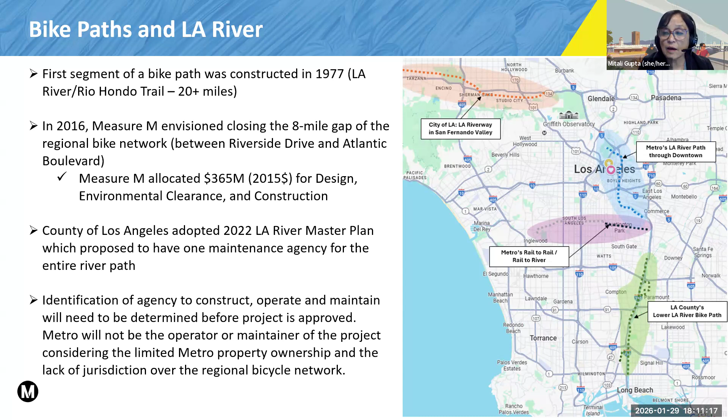The vision began with the original 20-mile bike path completed in 1977. Measure M later committed $365 million to close the largest remaining gap. In 2022, the County of LA adopted an LA River Master Plan, which recommends a single agency or entity to maintain the full 51-mile corridor when complete. As the project advances, Metro will identify an agency to construct, operate, and maintain it, since Metro lacks the property ownership and jurisdictions to serve in that role. I'll cover this in more detail later. Next slide, please.

This project is guided by 6 core objectives: safety, access, efficiency and sustainability, equity, user experience, and health. These priorities are built into the design with separate paths for cyclists and pedestrians, connections to key destinations, gentle slopes for all ages and abilities, and infrastructure that supports active and sustainable travel.

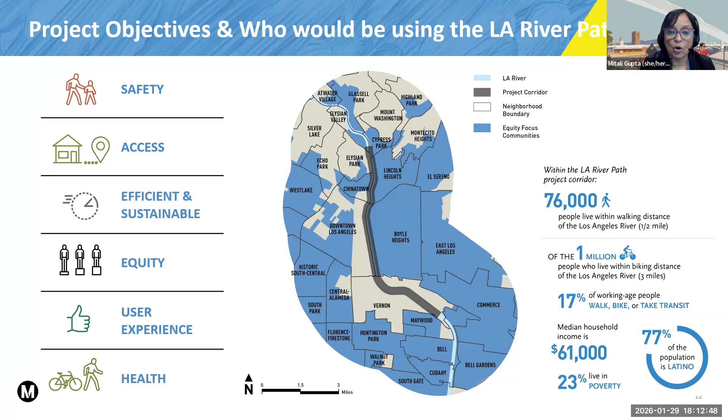Next slide, please. This corridor is highly constrained, as you can see from the picture, especially the one on the left lower side, because it has limited right-of-way due to rail lines, utilities, and power towers, including infrastructure within the river channel. The 8-mile project passes under 30 bridges, many of which are historic, and mostly under the City of LA's jurisdiction, requiring a combination of elevated and incised segments along the riverbank. The city and county together own 80% of the right-of-way. Metro owns only 1%. Additionally, there is easement held by the Corps of Engineers and flood control districts. As a result, Metro must pursue a partnership with the city and county to lead the construction, ownership, and long-term operations and maintenance. We've started some initial discussions, but no agreement has yet been put in place. With that, I will hand it over to Christian.

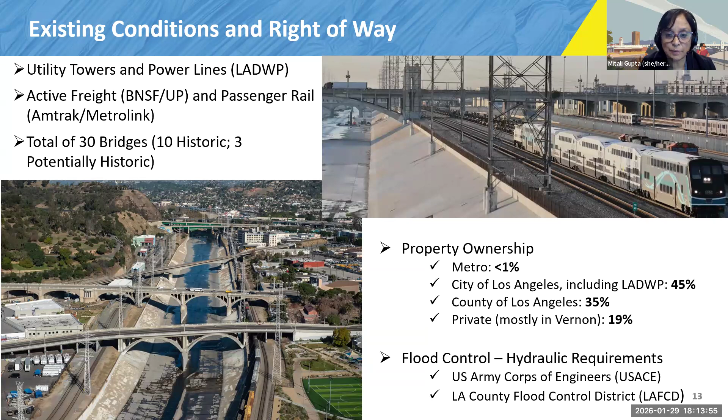Thank you, Mitali. Next, I will present the 3 key features common to all alternatives: access points, path types, and bike ped bridges. Access points connect communities to the project and may include amenities like wayfinding, seating, and landscaping. For the path types, due to limited right-of-way, much of the project will be built within the river channel, primarily as elevated structures or incised paths to navigate around railroads, utility towers, and bridges.

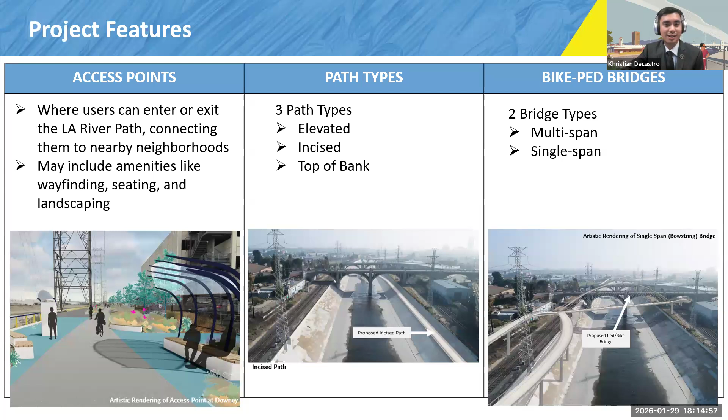Where right-of-way is available, mainly in the southern section, top-of-bank alignments are proposed. During conceptual design, a bottom-of-channel alignment was considered but excluded from environmental review due to safety concerns and poor performance against project goals. Public and stakeholder feedback emphasized safe access from both banks, leading to the inclusion of bike and pedestrian-only bridges, designed either with multiple footings or clear spans to cross the river. Next slide, please.

The design assumptions of the LA River Path project, proposed in Measure M, have since been refined as the design advanced. Since 2018, Metro has held several public and stakeholder meetings. The inputs from these meetings and the technical analyses of the project have influenced some key changes, including prioritizing safety, designing for wider paths to accommodate user demand and allow for emergency vehicle access, and access to both sides of the river.

In general, the alternatives start and finish on the west bank, connect to communities on both banks and to major destinations, directly or indirectly. These destinations would include LA State Historic Park, Albion Park, Union Station, and Park at 6th Street within the city of LA. In the city of Vernon, common connections include Bandini Soto Triangle, a commercial destination. Next slide, please.

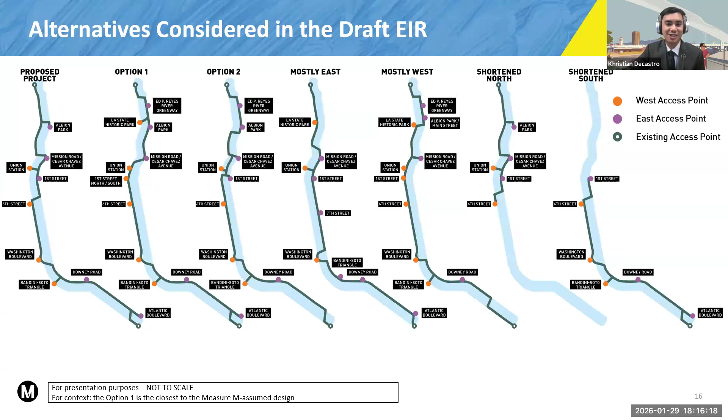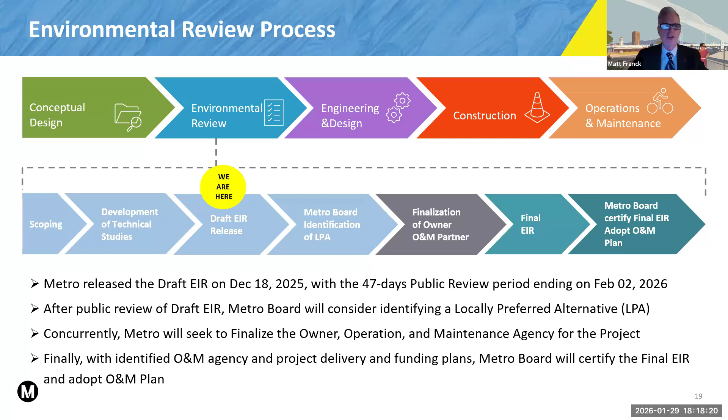So what is this draft EIR and why is it important? It is an environmental impact report, a formal study required under the California Environmental Quality Act, a CEQA document. The purpose of the CEQA document includes several important components. It analyzes the significant impacts of the alternatives across a broad category of different types of environmental resources, 18 of them in our case. For each of those categories, the impacts of the projects are evaluated, and where necessary and feasible, mitigation measures, these prescriptions, are made to reduce significant impacts.

Importantly, in addition to the technical aspects of the CEQA document, this process provides an opportunity for the public to review and weigh in on the project and its environmental impacts before Metro commits to a single alternative and advances the project forward. Why is the project important to Metro? The LA River Path would provide a safe alternative mode of transportation, especially for those who rely on public transportation. It expands equitable access to jobs, housing, and a myriad of other important community amenities and services, especially in this area, providing those to underinvested communities.

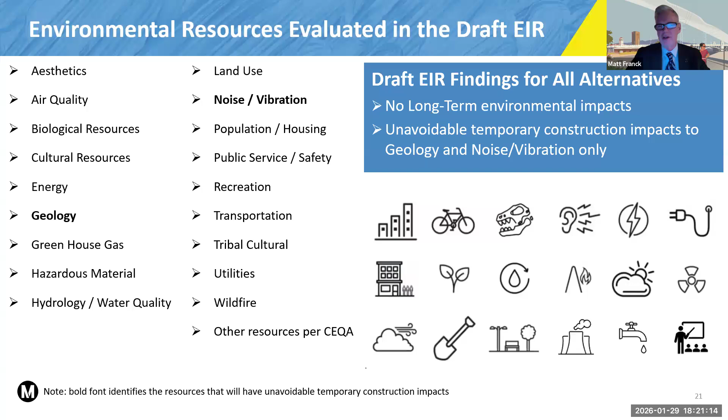However, for construction, it is a big project that's going to require a lot of equipment, time, and effort to build it. Although there's a variety of types of construction impacts, there are what we call significant and unavoidable impacts in a couple of categories. Those are highlighted in bold: geology, which is actually a paleontological impact, and noise and vibration. Next slide.

Let's take a deeper dive into those two specific categories where we have significant and unavoidable impacts. In areas where we expect deeper excavations into previously undisturbed soils, which will happen in some areas, especially where we have bridge piers or elevated structure requiring deeper excavations, there is the potential to uncover paleontological resources during construction that are currently unknown, but because it's the LA basin, we know they're down there somewhere.

We may or may not find them, but in case we do, we have a series of mitigation measures: starting with a plan for how to monitor and what to do if they're found, committing to worker environmental awareness training so people get a tailgate session on what to do if they find a bone, and a plan for curation of paleontological resources if found, from a scientific perspective. But it's still significant and unavoidable even with those measures.

For noise and vibration, it will be noisy during construction, and the noise levels will vary depending on the type of construction equipment used. In areas where there are deeper excavations requiring more intensive construction, those impacts would be greater.

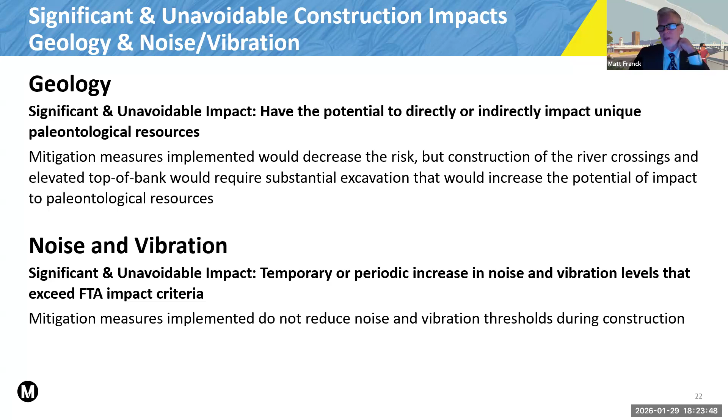We have a series of measures to ensure noise control, following local requirements for noise abatement to the extent feasible, but we still find it to be significant and unavoidable in some cases up and down the corridor. Next slide. So here's a summary of these different environmental resource categories and their conclusions.

We evaluated impacts during construction and after completion of the project. We've talked about significant and unavoidable impacts. We also have what we call less than significant with mitigation - so there is something to see in terms of significant impacts, but we've prescribed measures to reduce them below our thresholds in one case during operations, though mostly these are construction level impacts.

For most other categories, especially once construction is complete, there are less than significant impacts - there's something there, but it doesn't exceed any thresholds. In some cases, there's no impact whatsoever - those are no impact categories. So that's a quick summary of the contents of the draft EIR and its key conclusions.

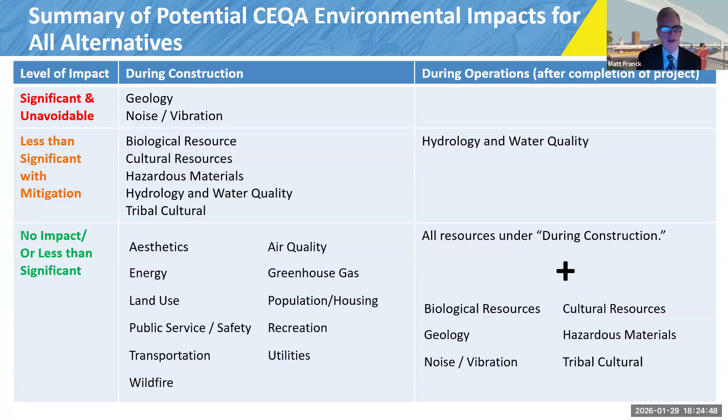If we go to the next steps, next slide, I'll turn it back over to Matali to discuss next steps. Thank you, Matt. Next slide, please.

So what happens after the public commenting period is closed? Once it's closed, Metro will collect all the public and agency inputs that come in during this time, and together with the draft EIR analysis, which we've already done, and consideration of feasibility, safety, funding, and schedule, we'll develop a locally preferred alternative, or the LPA, which could be one of the draft EIR alternatives or a combined hybrid option of these.

Due to funding constraints, Metro will also develop a phasing plan, which is in line with all the other Metro projects we are developing. This funding phasing plan will align the initial construction with the available funding so that we bring the benefits to the people of Los Angeles as soon as we possibly can.

In parallel, Metro will continue to coordinate with partner agencies to construct, operate, and maintain this project, including negotiating and writing up an O&M agreement.

The final EIR will identify the LPA, include responses to all the comments we are collecting now, and develop a mitigation monitoring reporting plan, or MMRP, to address the identified impacts. With that, I'll turn it over to Mark.

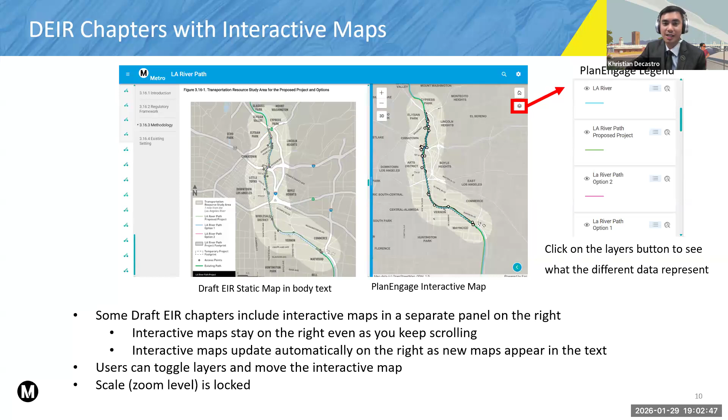Lastly, we have appendices, non-CEQA reports, and other attachments available as PDFs. If you scroll down, there are different sections labeled, full of PDF attachments, including the appendices, the notice of availability, draft EIR PDF versions, as well as non-CEQA reports. In the second panel, you could find different subsections of those PDF sets, such as the conceptual engineering plan set or the environmental site assessment. If you click any of these PDFs, it will open in a new window, and you could read all of those as a PDF in your browser.

That's all we have for PlanEngage for now. The good thing about PlanEngage is that after this hearing tonight, you could go home, read it, and submit comments at your leisure. It's also a very easy way to share and submit comments with all your friends, family members, and others in your community. So please tell everyone, we would love to read more comments. Thank you.

Okay, great, thank you. There was an anonymous attendee who asked if there will be any eminent domain actions, and there will be no eminent domain actions with this project. So thank you for the question, and we want to make sure you feel comfortable with that.

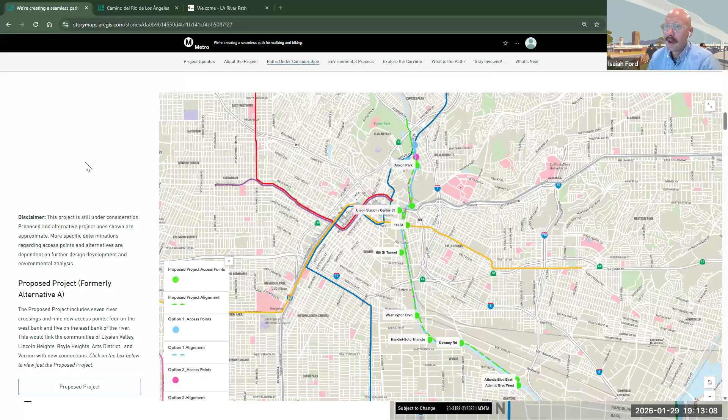As you continue to scroll through, this is where you can interact directly with the map itself to understand a little bit more about the proposed project, showing here in green on the map, and the different options being studied within the draft EIR too. This map is interactive — you can scroll directly in and click on the different icons within it to be able to... oh, that one didn't like that.

Let me get back to there.

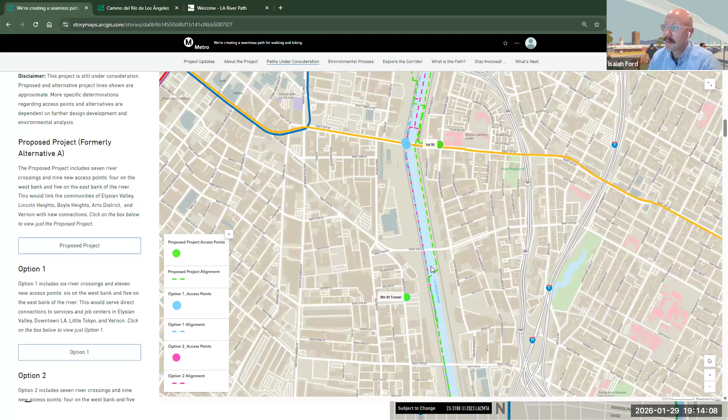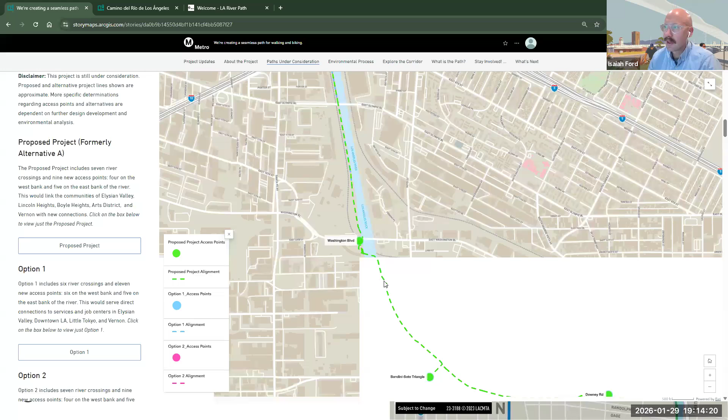So in your version, because I'm logged in, you can click on the different access points to see a little bit more information about that. You can click on the routes themselves to see where it is incised, top of bank, the different options being shown within the different path types here.

As you scroll through, it gives more information about each of those, including how many access points there are - 9 access points for the proposed project. For option 1, that includes 11 new access points and the different river crossings, where those sides of the river it is on show directly on the map.

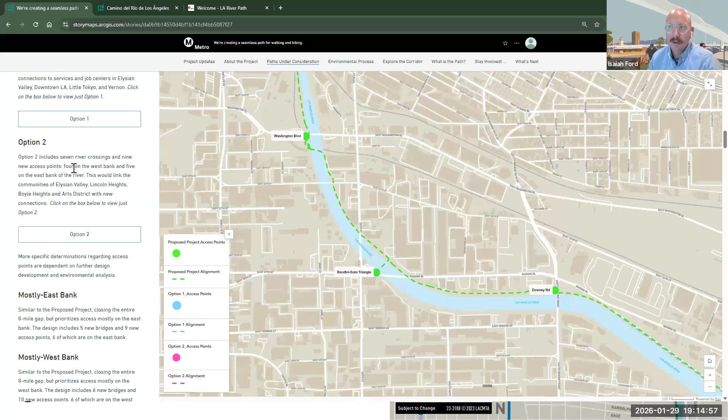Same thing with option 2, includes 9 new access points and 7 river crossings. As you continue to scroll down, there's more information about the mostly east bank, the mostly west bank, the shortened northern path, and the shortened southern path as well.

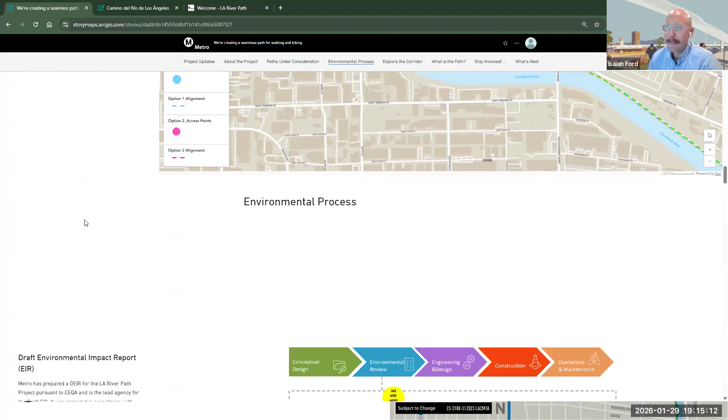And as you continue to scroll through this, there's more information about what the environmental process is and more about the draft environmental impact report, the schedule of the project, and where we are within that schedule.

Again, you can access that draft EIR by clicking the links directly on here. That'll take you to the Plan Engage site. There's information about the public review period from December 18th, 2025 to February 2nd, 2026.

And then it includes all those different topics being studied within the draft EIR that Matt went through. There's a little bit more information about the timeline and what the project objectives are that are included in the draft EIR.

And then all the different elements included within the project decision process, going through the draft EIR to the Metro Board of Directors considering selecting a locally preferred alternative, and then advancing the project design to continue into the final EIR after that.

And as you keep scrolling through, it may take a second or two for the map to load here. It's running a little bit slower for some reason.

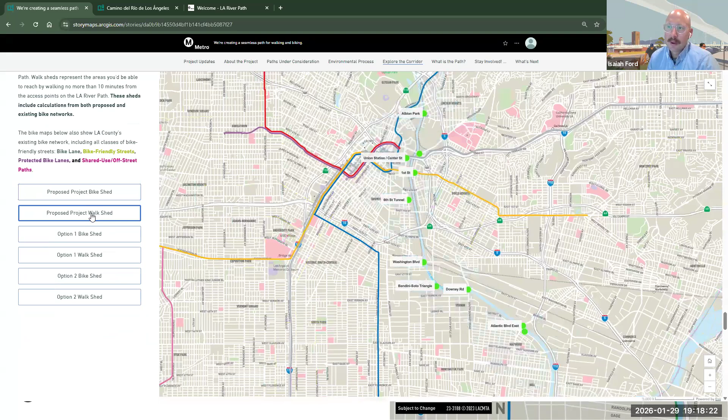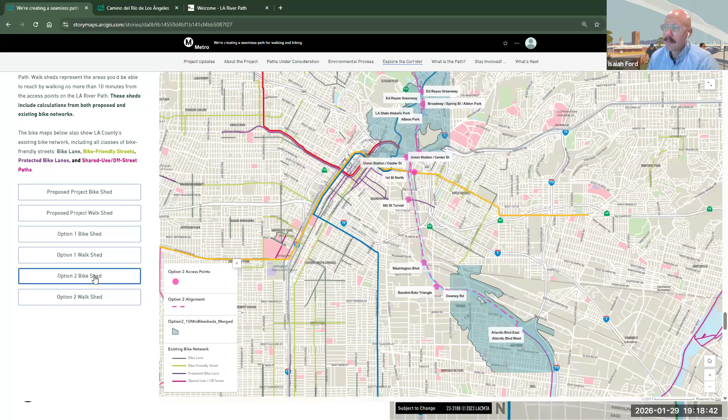The walk shed, you should be able to see where you could walk within a 10-minute walk around the different access points. For option one, it's the same thing - you can click on that to see the bike shed, the walk shed, and the same thing for option two, the bike shed there as well.

And I know we've gotten some questions about what are the different path types, what is the path, and what's being considered. There are some different design renderings - these are conceptual, giving you an opportunity to toggle back and forth to see what the path might look like within the LA River.

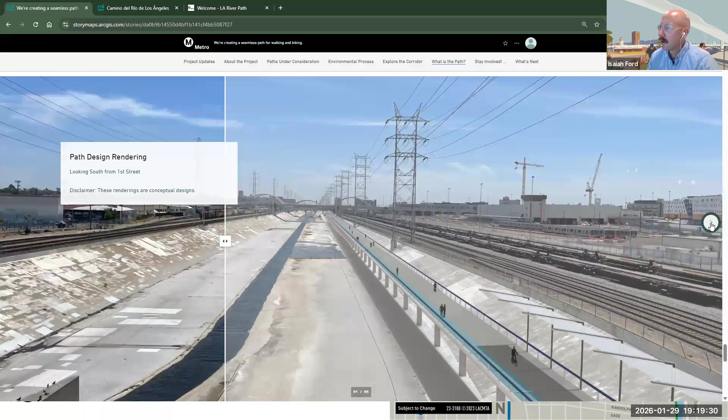So here we are looking south from First Street, and you can see with an incised path type what that might look like. As you continue to scroll across these, you can see different elements.

So there are some questions about safety, with an incised path, where the lighting may be and how that may look within the river today.

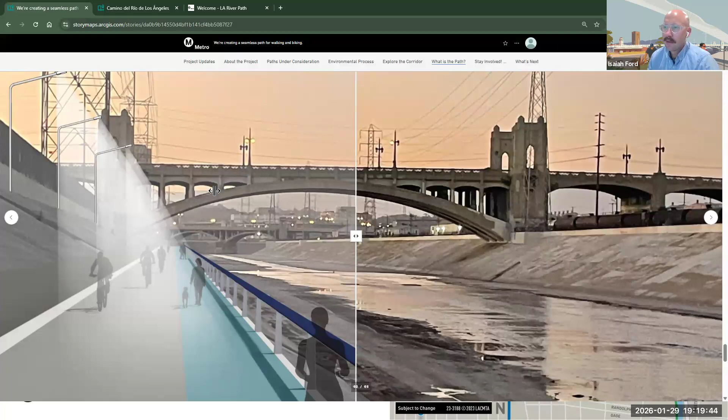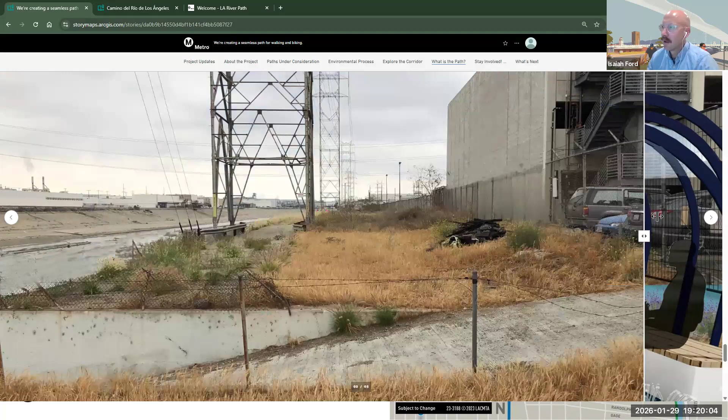I know there were some questions, some comments about including biodiversity and plants and trees and maybe some of the different elements that might be included within the path. And as you can see here, there are conceptual renderings that show what it might look like in the future.

And then, like we mentioned, specifically an incised path concept rendering—you can see here what that might look like. This is looking north towards Spring Street Bridge. And then an elevated path concept, again looking north towards Spring Street, and how the path might fit within the different historic bridges there.

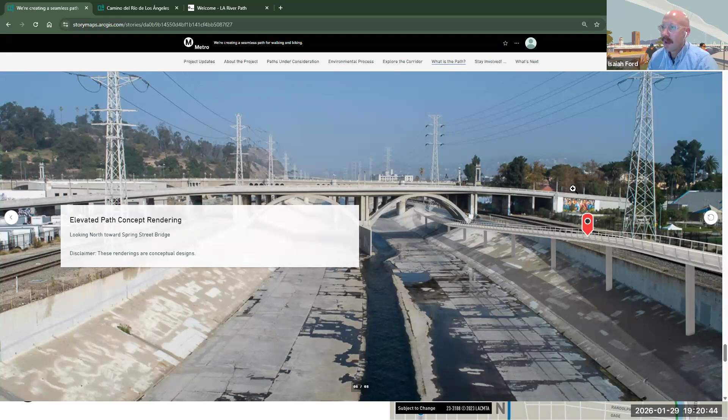So that gives you an overview of the different path types and some of those conceptual rendering options. And then as you scroll through, if you did want to share this with your family, friends, neighbors, frenemies, so that they are able to make it to the last public hearing, or if they still have time to join the one tonight, you can see more information about where that public hearing is, what the date is, and time.

And then as Mark went through, there are several ways to receive public comments. One of them is tonight—you can submit comments via the Q&A, or raise your hand and submit a verbal public comment. You can also do that at the public hearing on Saturday. You can also provide public comments directly on that Plan Engage site via the comment tab that Christian went through. You can also submit written comments.

You can email those directly to us here, or mail us at Metro 1 Gateway Plaza—the mail stop is here in Los Angeles, California, 90012. You can also call the project hotline and leave us a voicemail if you'd prefer. And you can join Metro's project email list to receive updates on the project. At the very bottom, if you wanted to email us comments, you can just click that button instead of copying and pasting the email above.